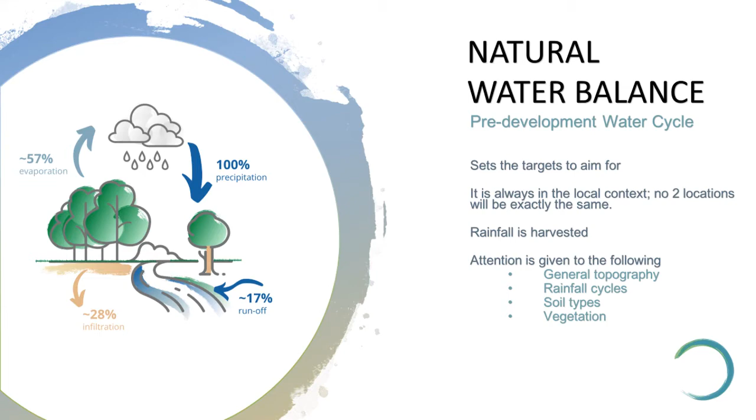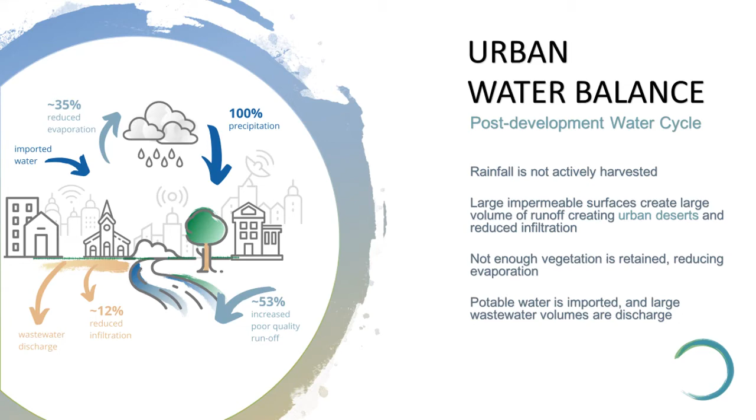Our current design practices disrupt this natural water balance, resulting in extreme drought and flooding. We have indirectly created our own challenges by introducing large impermeable surfaces and not retaining enough vegetation in the final designs. By going back to nature, we can start to design communities that are water sensitive and align with the natural water balance of a site.

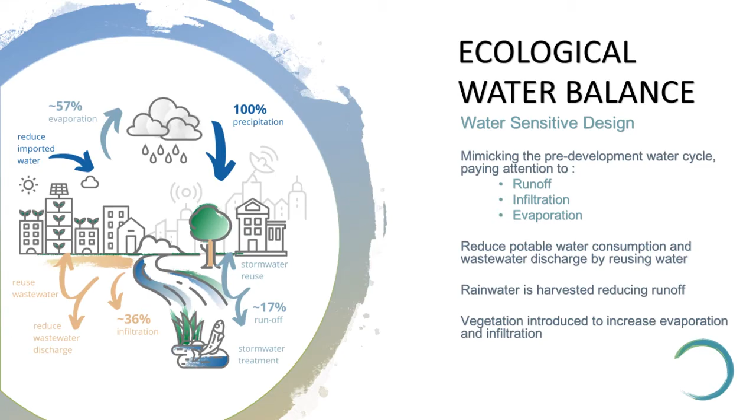To leverage the impact of regenerative design, we have to aim for the targets set by the pre-development conditions while paying attention to runoff, infiltration and evaporation. There are so many benefits to adopting a regenerative design solution. The most notable is the reduced municipal demand by focusing on a hybrid off-grid solution.

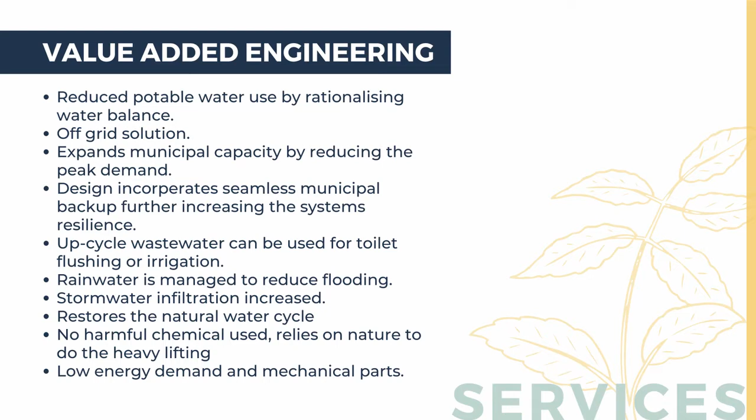This will enable many developers to move forward with projects that have been shelved due to a lack of bulk municipal capacity. In a country with an aging infrastructure and no budgets, economic water scarcity is a real risk and challenge. The other real advantage is harnessing the power of nature to do the heavy lifting, directly reducing energy demand and mechanical parts.

The mega school would be a very favorable project for a regenerative design solution. In the case of a day school, it would favor a water-sensitive design approach in order to manage rainwater, by utilizing rain gardens to drive water back into the groundwater system for borehole harvesting in the dry season, especially as 50% of the water demand is for irrigation purposes.

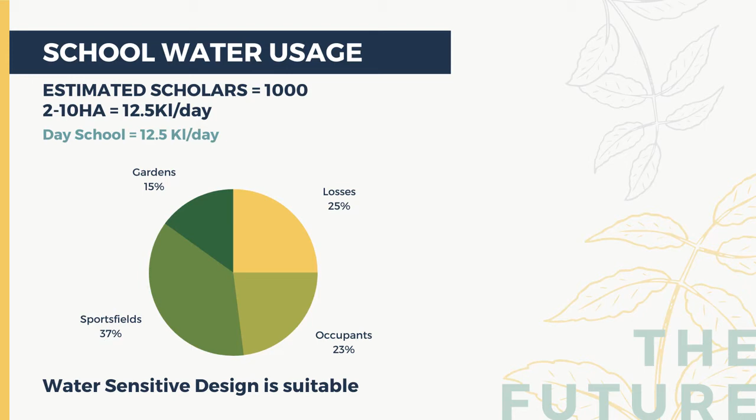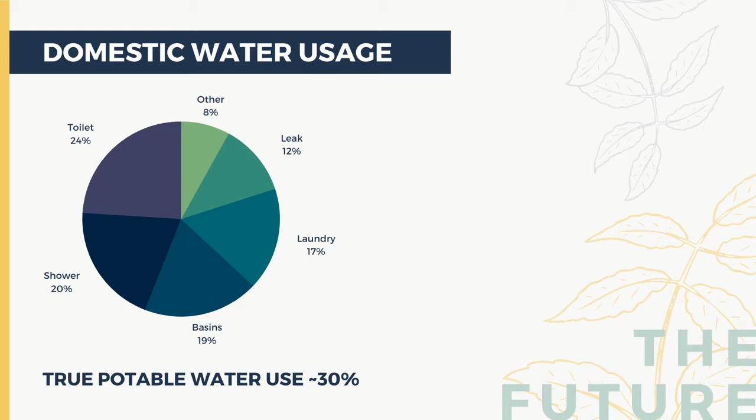Should the mega school have boarding facilities, then it will tip the solution more favorably towards a net positive water solution, where recycling grey water and even black water can contribute towards the water demand of the other utilities. This is made possible because the true potable requirements for most domestic use is in the vicinity of 30%.

In order to create this regenerative design change, we have to aim for the targets that were set by the pre-development conditions, paying attention to the water supply, wastewater reclamation and stormwater management. In order to build resilience into the design, we need to diversify the water supply. Rationalizing the water demand as fit for purpose, we create an optimal water balance for a project.

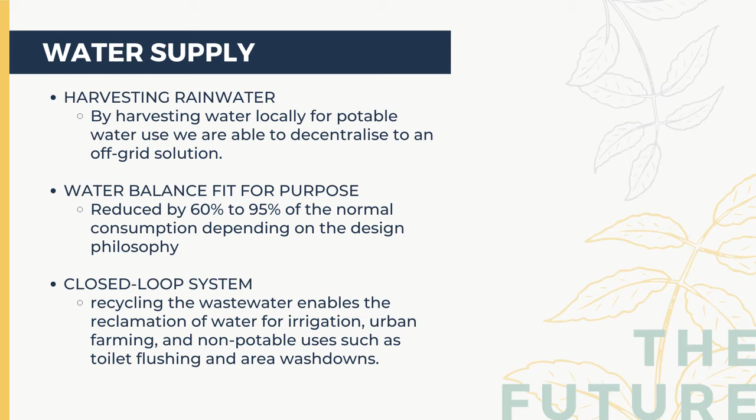We then further look at borehole, water vapor harvesting, and wastewater reclamation as part of the solution. By harvesting water locally for potable water, we can decentralize to an off-grid solution, effectively creating free water while reducing the risk of flooding.

Rainwater is one of our purest forms of potable water, requiring the least amount of effort to purify, and it should be used exclusively for potable water or irrigation and not toilet flushing, which seems to be the trend. The potable water demand can be reduced by 60 to 95% of the normal consumption depending on the design solution adopted. Potable water usage is further reduced by incorporating water-efficient devices such as composting toilets, waterless urinals, and hand basin sprayers.

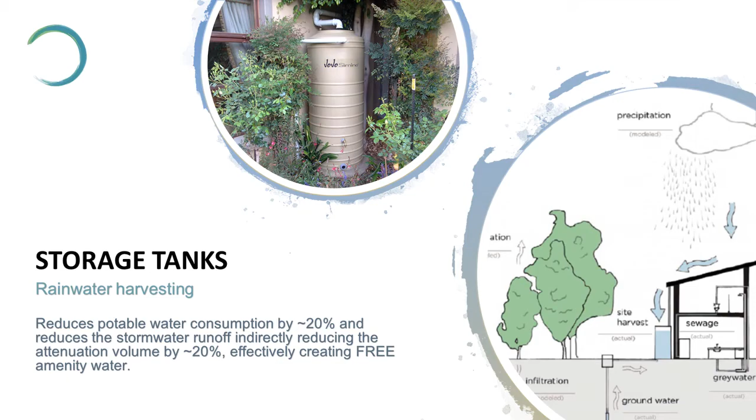When we look at the wastewater system, we need to consider reuse, reclaim, and recycle as much as possible. We need to treat black water as a valuable resource by recycling the nutrient-rich wastewater for irrigation and urban farming. It is also possible to use this reclaimed water for non-potable uses such as toilet flushing and washdown areas.

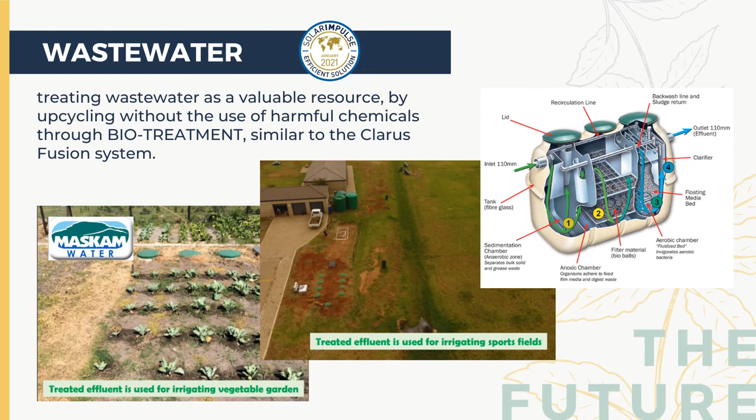The benefit of a biotreatment system is that it mimics nature's purification process without the use of harmful chemicals. These systems also have very few moving parts and are low in energy demand that is suitable for an off-grid solar solution.

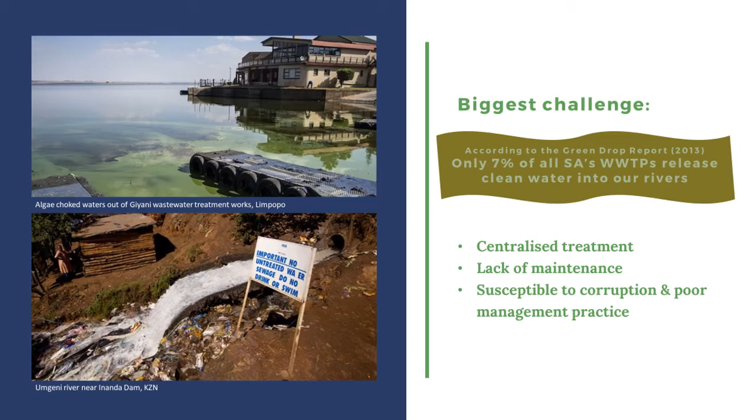One of the main reasons for decentralizing the wastewater treatment system is that 90% of South Africa's wastewater treatment plants do not operate correctly. They are fundamentally dumping raw sewage into what is a downstream user's potable water source, indirectly creating health challenges. Another wastewater recovery system that is very cost-effective is grey water harvesting.

The Living Machine was a student initiative that won the Zayed Sustainability Prize in 2018 and was designed and built in 2019. EnsO Earth were part of the design and construction supervision team. This was the first grey water reclamation living machine to be built in Africa.

The system effectively harvests 1 kiloliter of grey water daily from the kitchens. The water is being used to irrigate the agripreneur sustainable farming studies. The Living Machine is now incorporated into the science and biology teaching curriculum as part of the nature-based solutions. Students actively participate in managing and monitoring the system's health.

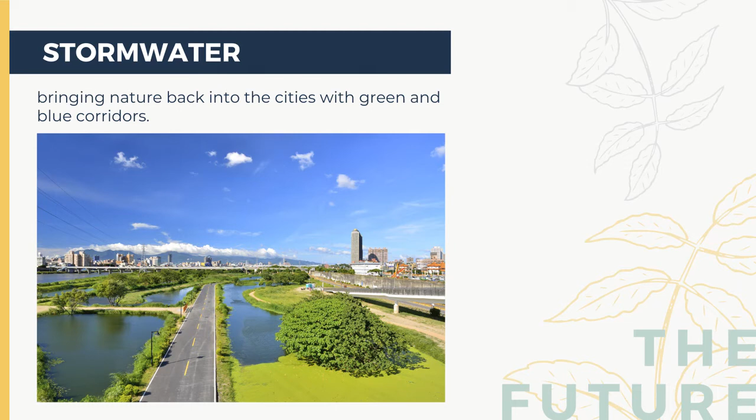Water-sensitive design and net positive water are holistic systems that incorporate rainwater, wastewater, and stormwater management. One of the biggest stormwater challenges in urban design is detention storage. This is a direct result of the large impermeable surfaces that have been introduced into our urban spaces. The current design philosophies often result in underutilized, inaccessible spaces that are expensive and unsafe.

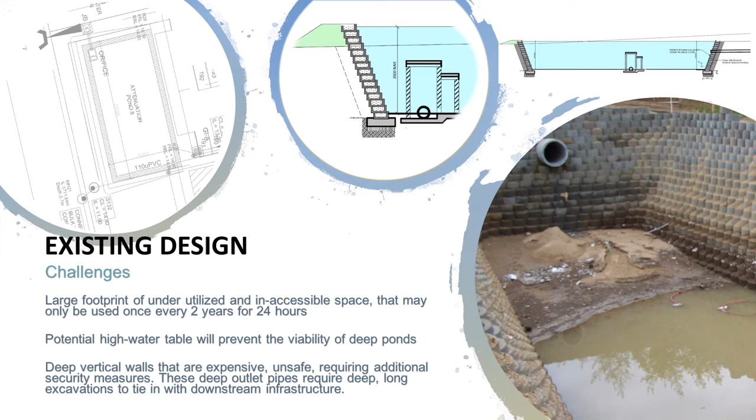Having designed many of these terrible ponds in my past, this has for me been one of the most exciting aspects of stormwater management in this new context. Because who would not want this in their back garden? There's a lot that can be said for biophilic design that brings nature and water back into our urban spaces, contributing to our overall well-being.

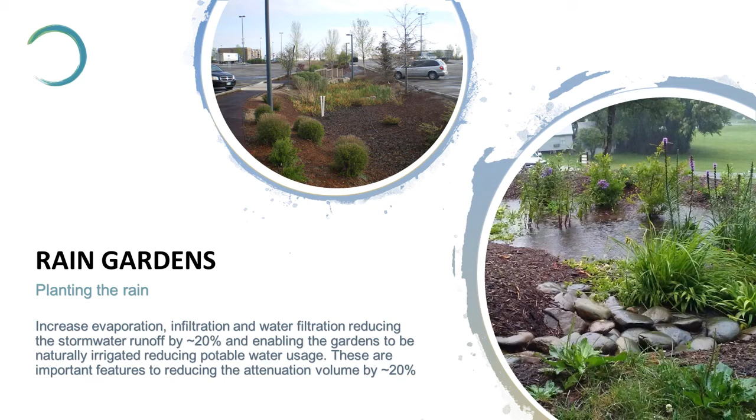Rain gardens or bioswales is another important strategy to drive water back into the ground, to bank it for later extraction via boreholes, further adding to the resilience during the dry seasons. Tree wells are another example of self-managing solutions that serve as a filtration system as well.

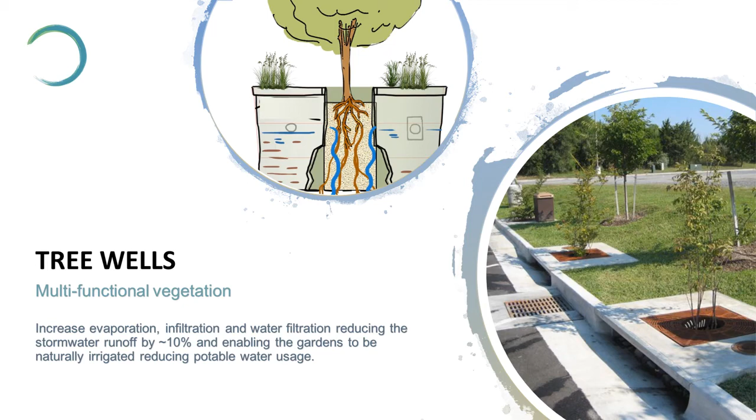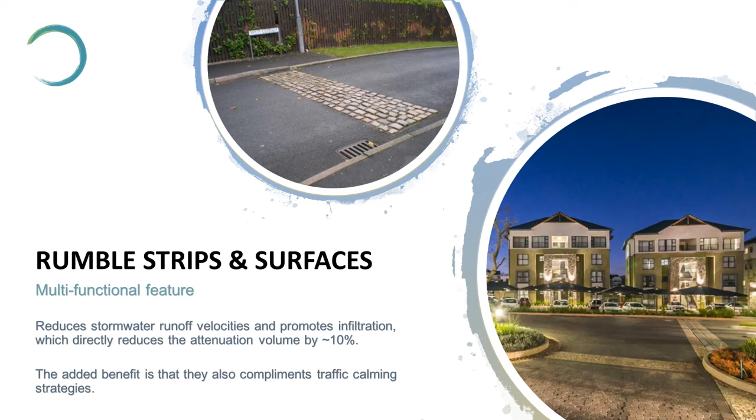The latest trend is permeable paving and the option to treat the parking areas as water reservoirs for slow release after the storm peak. Rumble strips also help reduce runoff velocities with the added benefit of traffic calming. The final design solution will always depend on the site conditions, but these are examples of what is possible.

EnsO Earth then went on to push the boundaries of conventional wet services engineering to embrace net positive water for the Corlet project. This building was designed in accordance with the Living Building Challenge, which has one of the highest water certification programs in the world. This is demonstrated by the fact that of the 600 certified buildings globally, only 50 buildings have achieved full net positive water certification by the International Living Future Institute.

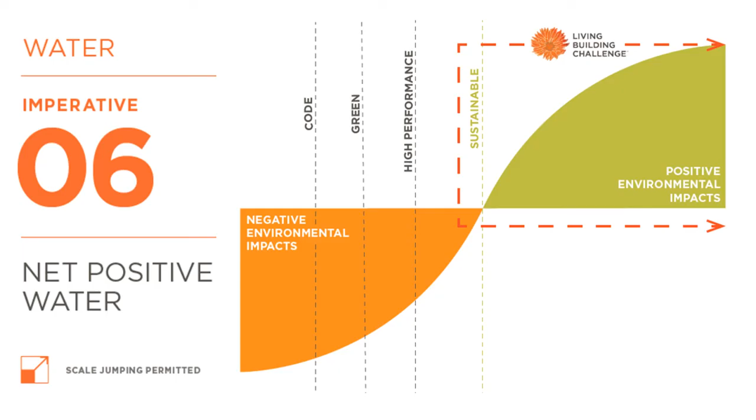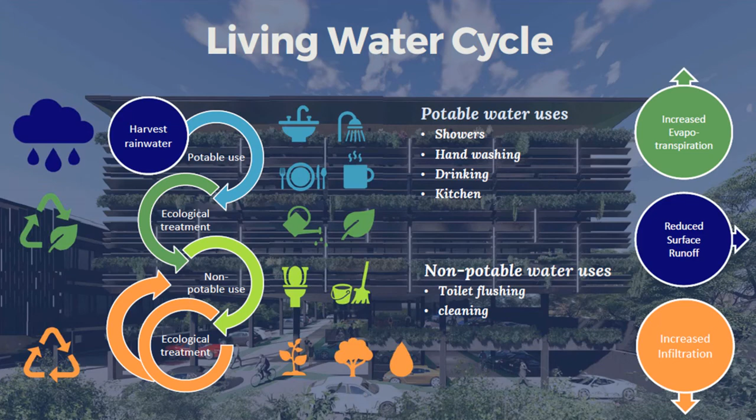The fundamental design philosophy of the living building net positive water is that the building meets all its water demands within the footprint of the site, without the use of harmful chemicals, and must incorporate rainwater harvesting, wastewater and stormwater management. The philosophy of the living building is to design a building like a flower, where it will meet all its immediate needs within the footprint of its site. The objective of the design is to increase evapotranspiration, reduce surface runoff, and increase infiltration.

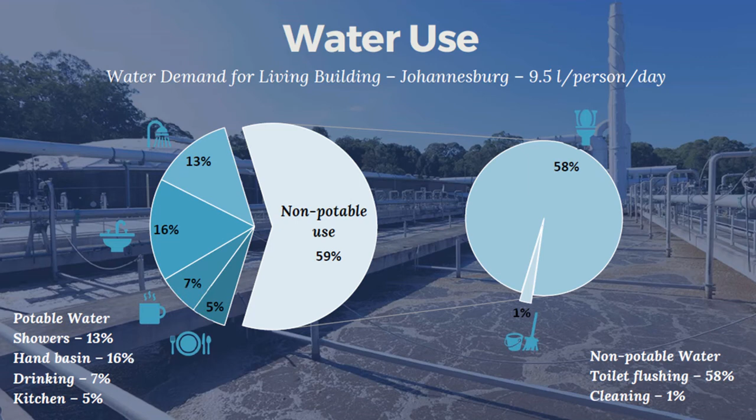Adopting net positive water principles, we were able to reduce the potable water demand by more than 60%, to less than 10 litres per person per day for a commercial building. Once certified, this project will be a groundbreaking first for the African continent, as it will be the first Living Building Challenge certified net positive water project in Africa. So this is a big shift from what we were doing 20 years ago.

So the question I get asked the most is, why change? Why incorporate a non-profit into the organization? The answer is actually very simple. It was an evolution. I did not wake up one morning with a burning desire to change the world. I just wanted to ensure a future for my grandchildren. It was a series of small incremental steps that brought us to this place. That has led us to create these 3 different divisions in EnsO Earth.

Our foundation is a non-profit company, and its function is to secure funding and develop the business cases that will support our vision. Projects is our traditional for-profit company that has existed and executed engineering and construction projects for the past 3 decades. Our initiatives are a hybrid partnership between the for-profit and non-profit that promotes this shared vision.

At the heart of this is the Regend initiative, which will build capacity by training the future designers in regenerative design solutions. As infrastructure is the backbone of civilization, we will continue to push forward to find the projects that will become the tipping point while we design a better future. This is the start of a new chapter for us, where we learn from nature to design a world that works with nature in order to ensure our future on this planet.